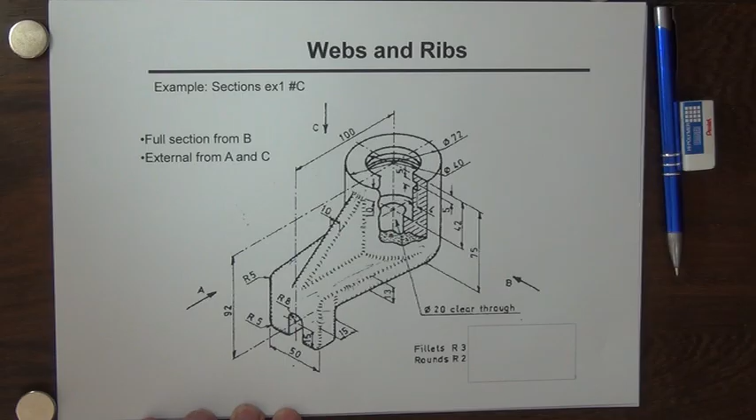Let's have a look at sections exercise 1, number C. So what we can notice over here is the component has these wormy lines all around most of the outside and inside there. So remember, those wormy lines indicate a rounding. And we can see at the bottom right here, we have been given the size of the rounding. The fillets are radius 3.

A fillet is an internal rounding, and the rounds are 2. So these external rounds have a radius of 2. So that would be these ones, the ones on the outside, down the bottom. All those ones have a radius of 2, and the internal ones have a radius of 3. That one would be a 3 as well.

We can notice that the top of this cylinder on the right hand side, the diameter 72 cylinder, has a sharp edge on the outside and the inside. And the top is completely flat because that line there is also a straight, sharp line and not these wormy lines. So that means manufacturing wise, this component will be cast, and then the top of the cylinder will be machined flat. Remember, when we machine or cut, we cut something and it has sharp corners after we cut it.

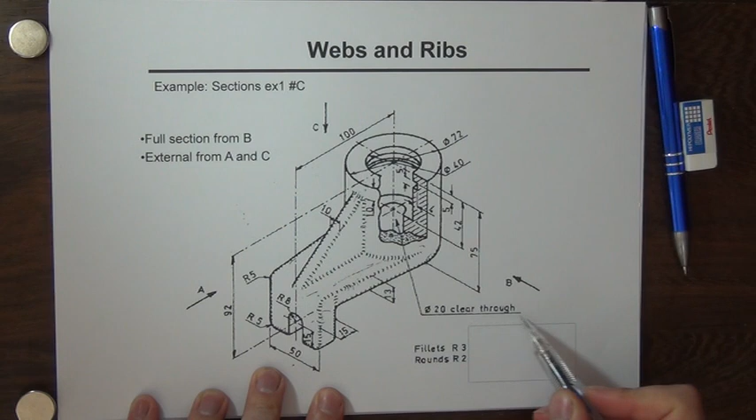If it is cast, melted and then poured into a shape restricting device, the outside edges all have these roundings on them. So this is machined afterwards. The hole going in is also machined because all of the corners are sharp. The hole going through, diameter 20 hole, clear through, is also machined in afterwards. It could be that it was cast with cavities and then just a little bit of machining is necessary, but these surfaces are all machined.

You'll notice there's a small groove here, 5 mm wide and 4 mm deep, also machined in. And here at the bottom left, this line over there is a sharp line, and the one going to the back as well. So this little shape is also machined in afterwards. So apart from that shape and these holes in the top surface, all the other surfaces should be rounded where they join adjacent surfaces.

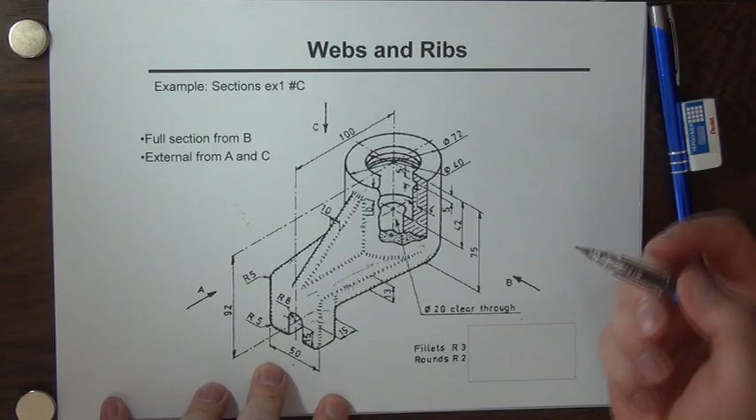So let us start by reading the question. It says, do a full section from direction B. So this is direction B. That will give us a full section view. And then it says, do an external view from A and C. So here we'll have, if that's the main view, then A will be a left view and C will be a top view. So if we just do our view layout planning over here,

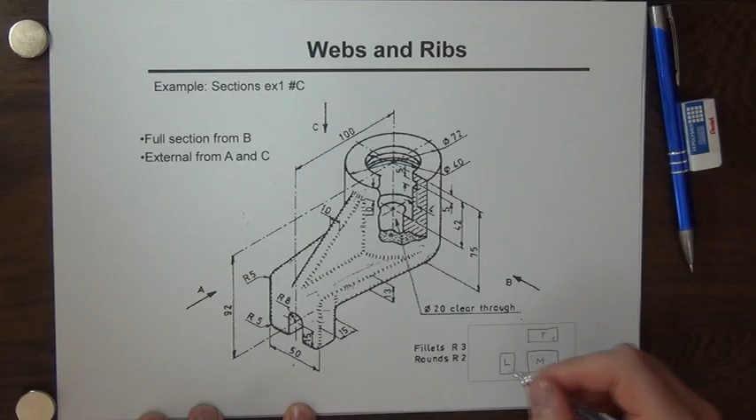that would be our main view. Above that we have a top view. And there we'll have the left-hand view. So this is view B, that is view C, and this one is view A. Good, so now that we know more or less what to do, we can start by drawing the main view. Main view B is going to be a full section.

So I would recommend that when you do these drawings, start with the detail view that has the most information in it. In this case it would be the section view. The reason why I say that you start with it is usually that's where the most marks would lie. So if you end up not being able to finish everything, then at least you have the most important views done. Okay, so you start with your thin pencil, and then we can draw a block into which we will draw our view.

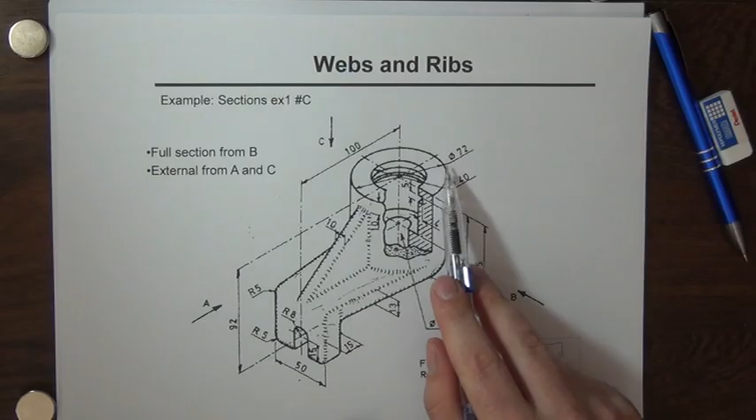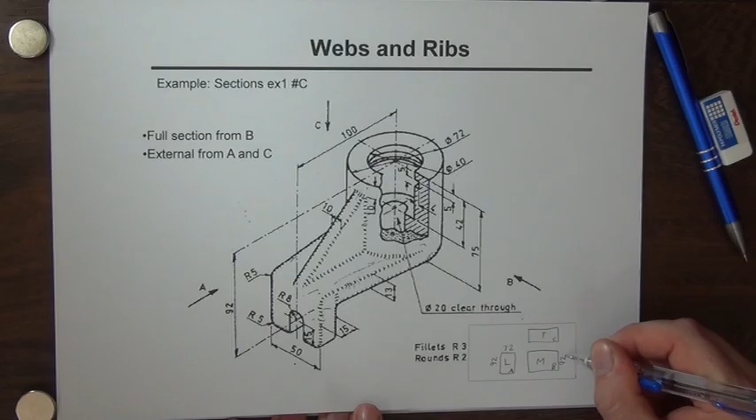So if we go to the question, that cylinder at the back has a diameter of 72. So that means view A has a width of 72. The height over there is given as 75. On the left hand side, the total height is given as 92. My main view will have the same height, 92, and top view will have the same width, 72.

Now let's quickly just calculate the length. From this dimension, all the way from the left to the middle of the cylinder is 100. To get to the end, we must just add the radius of the diameter 72 cylinder. So 72 divided by 2 is 36. So overall length is 136. I just put that there for the people who would want to copy the dimensions, which might have been too small in the zoomed out version.

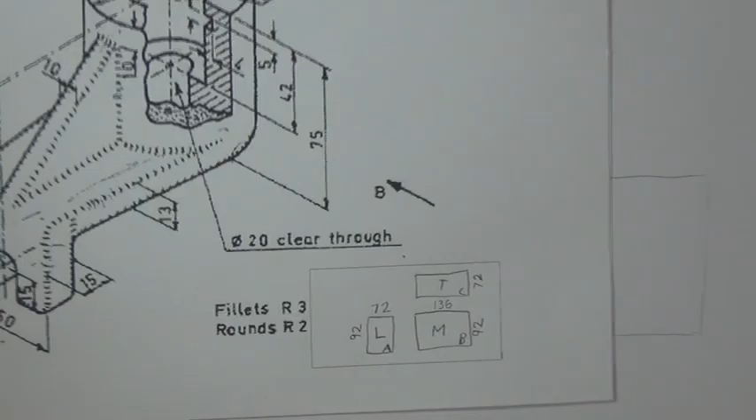Good. So now we can start with our views. Main view 136 by 92. Remember, these dimensions are just used for proportion. We're not going to exactly measure out these values using a ruler because this is freehand drawing, so we don't really care about using rulers. Okay, so now after we've drawn the block for the main view, let's do the block for the top view. Remember, they must be in line.

And then the one for the left view. It is 72 wide, 92 high. Something more or less like that. Good. So the main view. Remember now that the main view is a full section view.

I'm going to start by drawing the outside lines of this view, and then we'll add the internal detail later. Big cylinder has a diameter of 72. Overall length was 136. So the big cylinder is just over half of the overall size. Let's say somewhere there. Something like that.

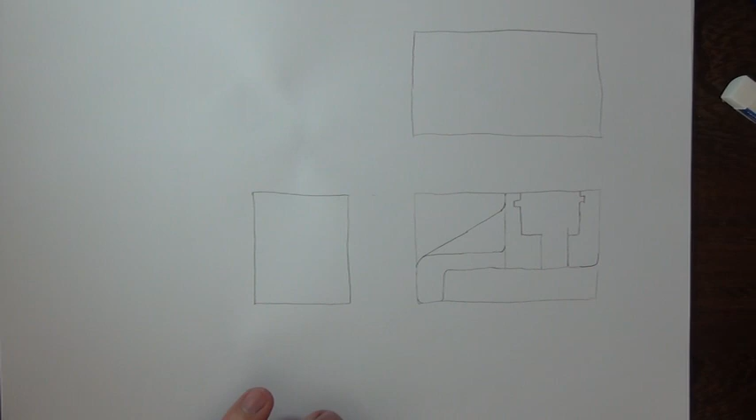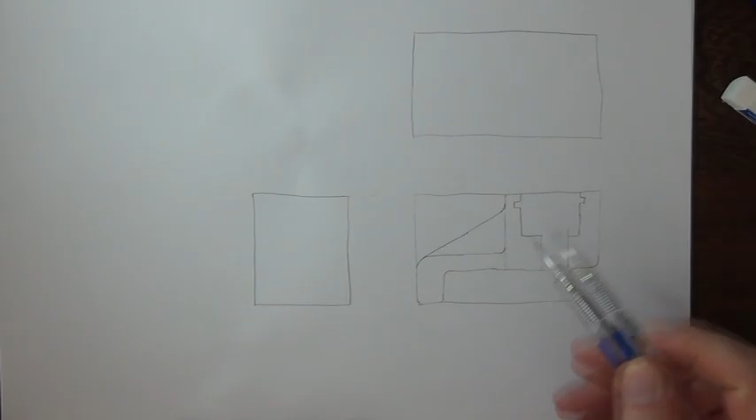Now we can start to darken the visible edges, remembering that this is a section view. One thing to note though is this triangle over here. If I just bring back the 3D, that triangle over there has a width of 10 millimeters. So if we now go and make a section view straight through that triangle, we're going to end up making this triangle even thinner than what it was before.

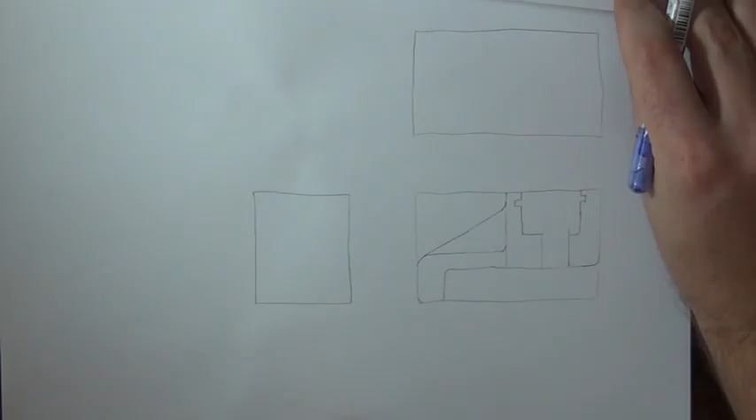So convention with section drawings is when you cut through something that's already thin and you cut it in the plane in which it is thin and make it even thinner, we do not hatch that feature. So basically this triangle of mine won't be hatched over here. And there's actually a very simple reason for that.

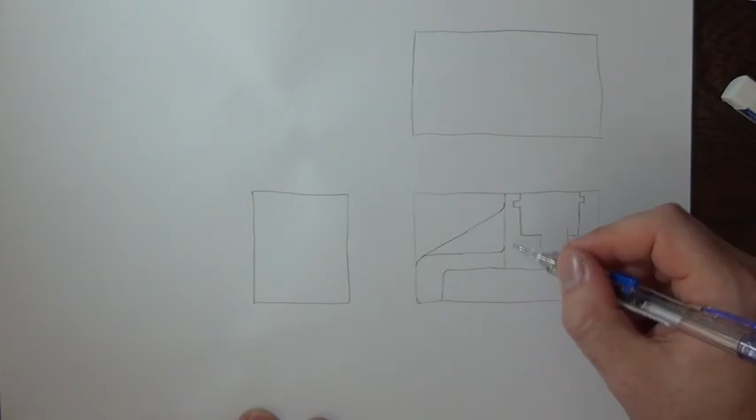The reason is, if we were to hatch this entire thing as solid, we would make the reader of the drawing think that this triangle is relatively thick or comparably thick to the rest of the component. Whereas if we were to exclude this from the section, meaning leave this triangle open, we can show that it is there, but by not hatching it, we show that it is actually thin compared to the rest of the component. So we are not going to hatch this triangle.

Remember we had that little cutout at the bottom left as well. So now I'm going to use my thicker pencil and I'm going to darken all my visible edges.

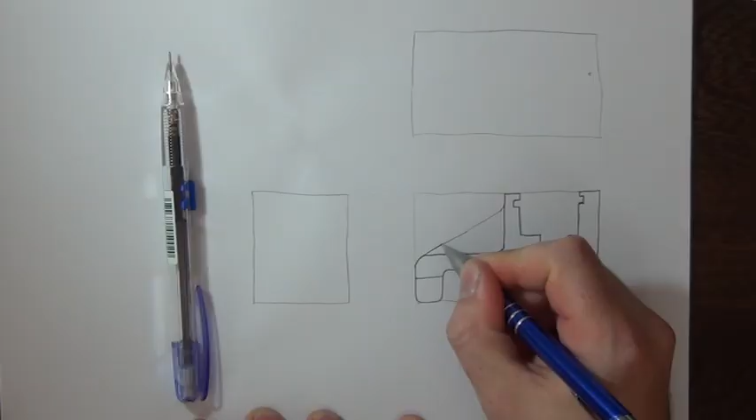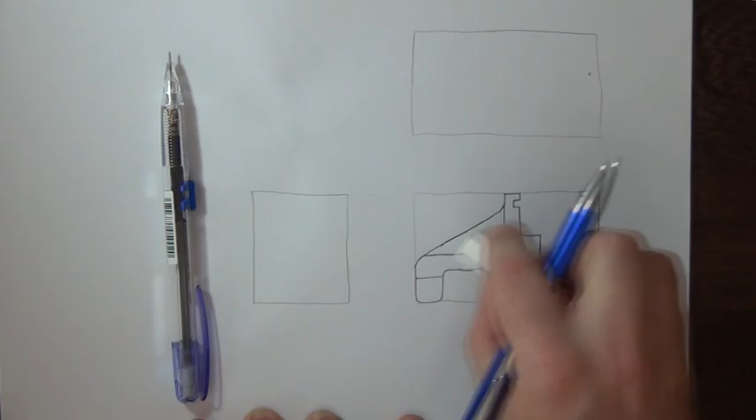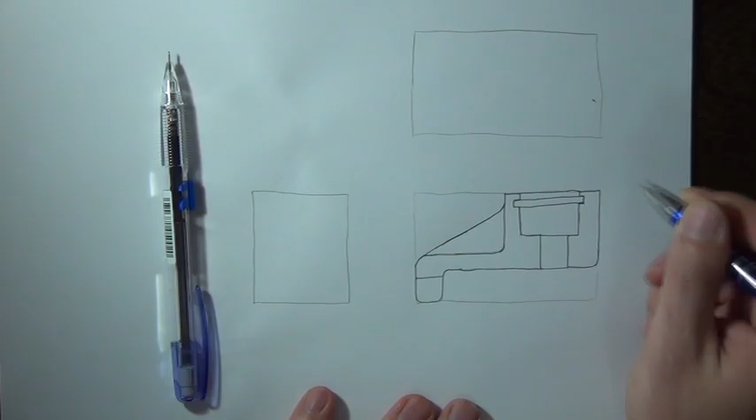Good. So just some things to remember. Because this is a section view, all these lines in the background, which were internal, would actually now become visible. So it's important to remember to draw all of the background information in there as well. And now I'm just quickly going to erase my block.

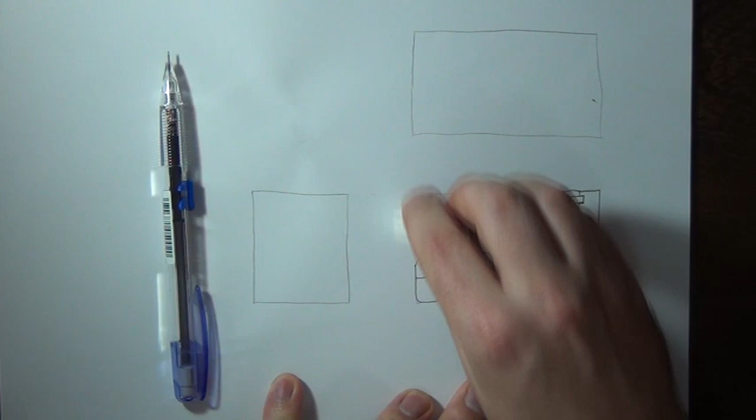Okay, so now that the outside lines of the main view are done, we can now go and draw in our hatching lines. So hatching lines are done using your thin pencil and usually at an angle of 45 degrees. It can be 45 degrees in that direction or in that direction, it doesn't matter.

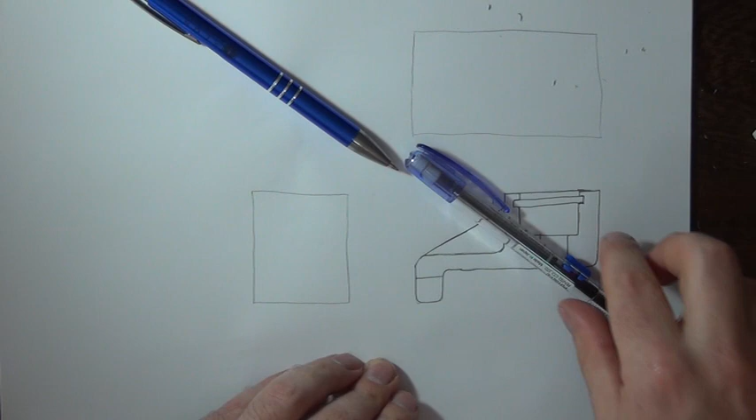Best would be to look at the drawing view and see if there are any lines already at a 45 degree angle. In this case, we don't really have that problem. But if this line had been at 45 degrees, it would make sense to use a different angle like 30 or 20 or something like that. But for this example, it is not a problem.

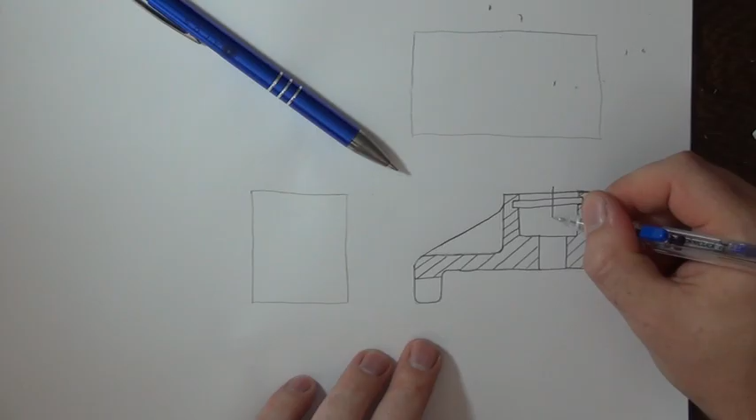Good. Now that we have those done, we can draw our center lines. Center lines are also done using your thin pencil. So that would be our section view. Now let's have a look at the top view.

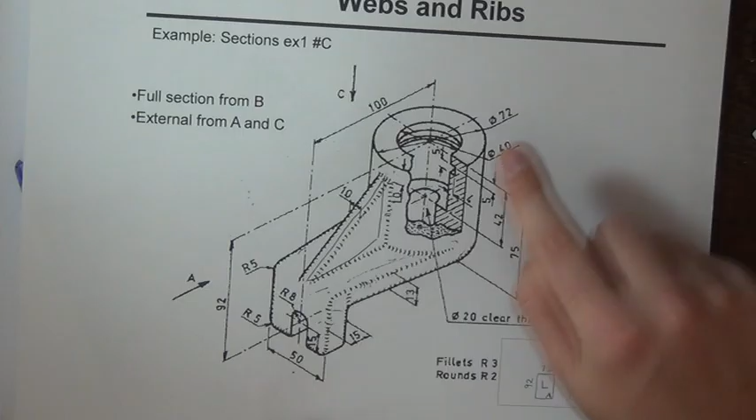So from the top we'll see the big cylinder with a hole in it. We'll see this web of ours and this bottom plane that goes smaller to the left. 50 over there, 72 over there. So this one should be just a bit bigger than 2/3 of that one. So in my top view, center of the cylinder would be somewhere there.

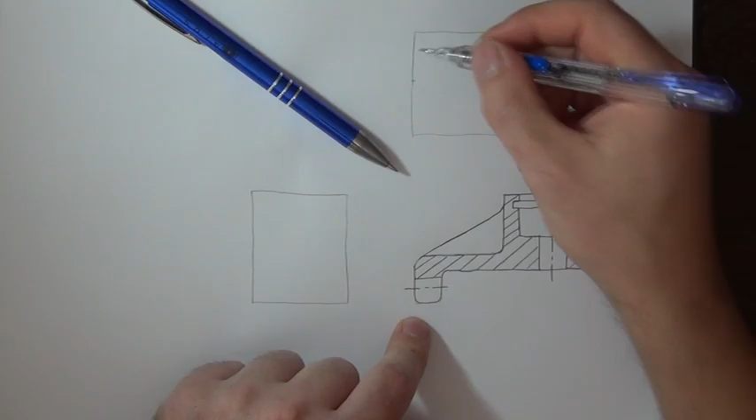Something like that. We have the smaller circle inside of that. And then inside of that we have the even smaller circle. Good. Now on the left hand side, remember I said it is just a bit bigger than 2/3 of this cylinder, so it would be somewhere there. Something like that. And now from here it goes out tangent to the big circle.

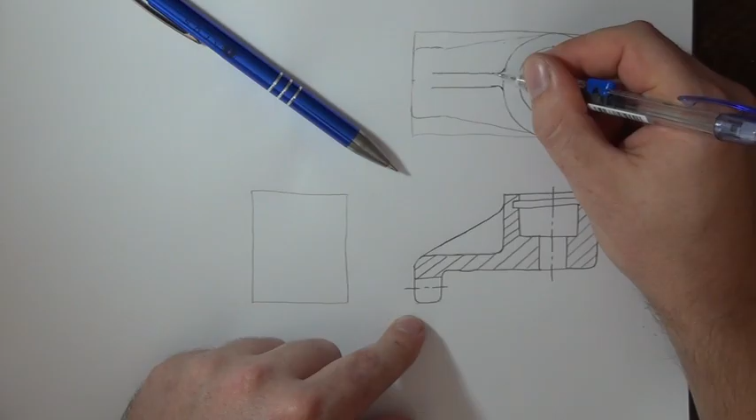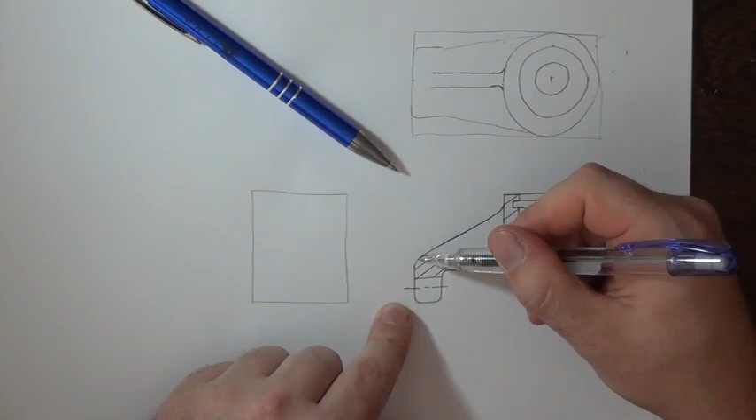Like so. And this inclined plane, remember we had a rounding over here. Same on the top side. Now here we have an inclined plane tangent to a big radius. Big radius basically just means the point of contact on this inclined plane is visibly different from the outside edge. So that distance is quite obvious. If that radius was very small, the horizontal distance would be very difficult to actually see.

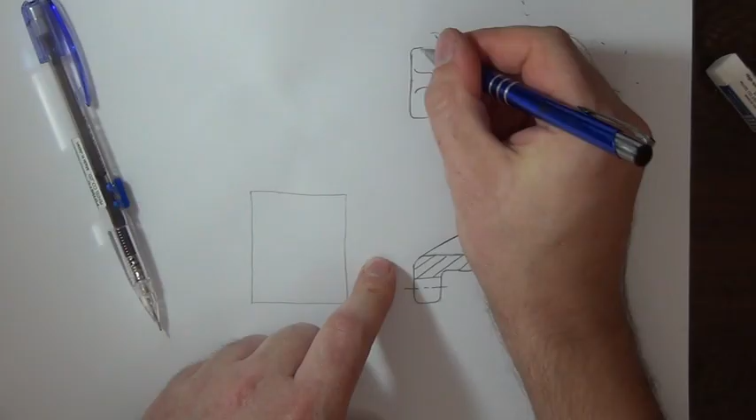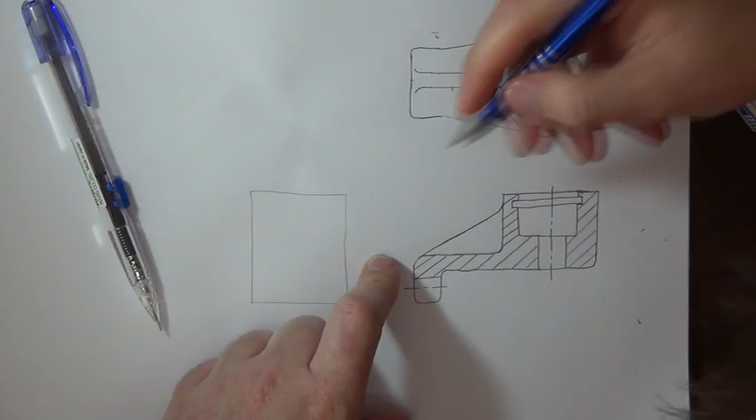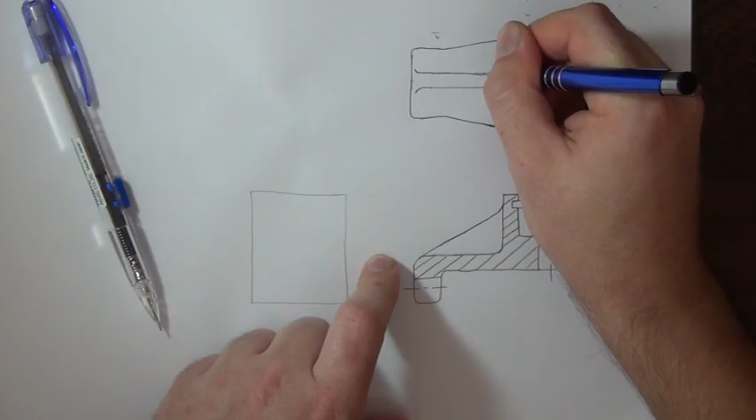Something like that. So now I can darken all my visible edges and erase my construction lines. Good. And the small circle. Like that. Then center lines. Remember, we do have this little hole at the bottom, so I'm going to use the same center line for the whole top view.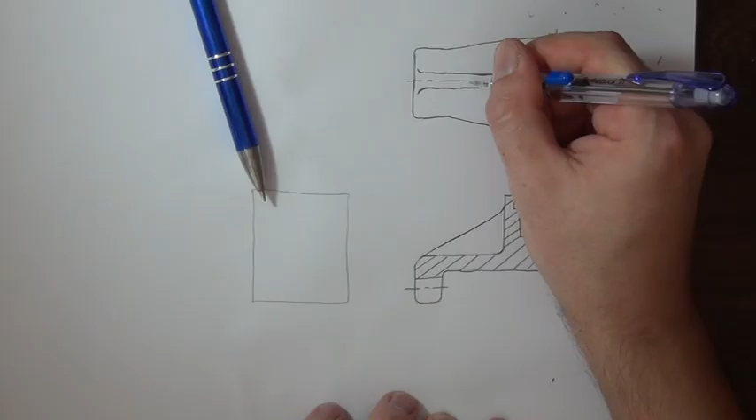So basically what that does is, firstly it shows that this hole and this one are on the same level, and it also shows that my top view is symmetric. So by using that center line all the way through, I actually show more information with less effort. Now let's do the left view.

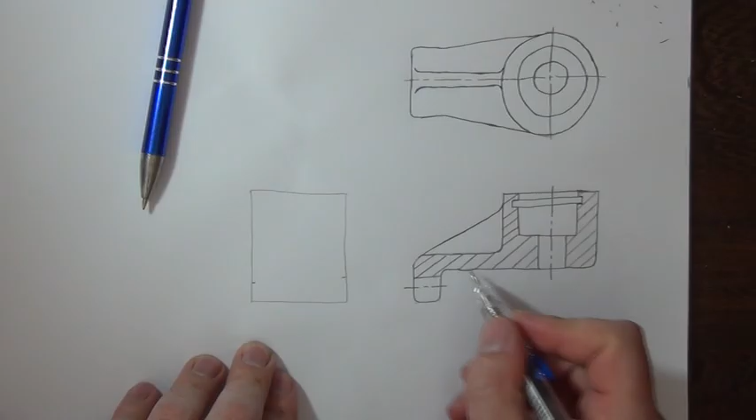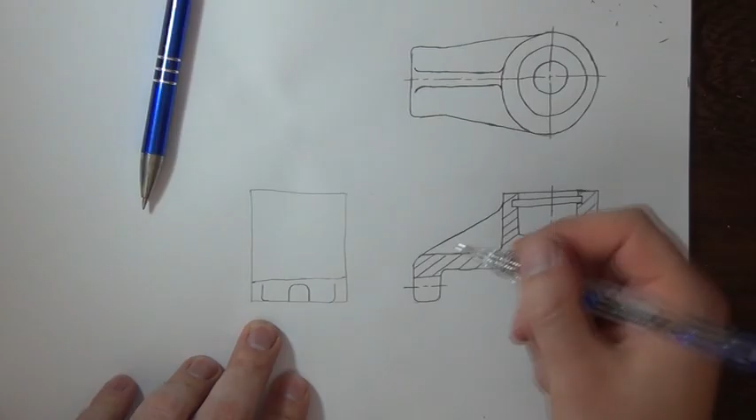So for the left view, we've got the big cylinder in the background. This is just the bottom of that big cylinder, just a construction line. Then we have this portion in front. This line is below that line, so something like that. Goes out to the side, as we said just now, a bit more than 2/3 of the size of the total width. Then we have a round over there.

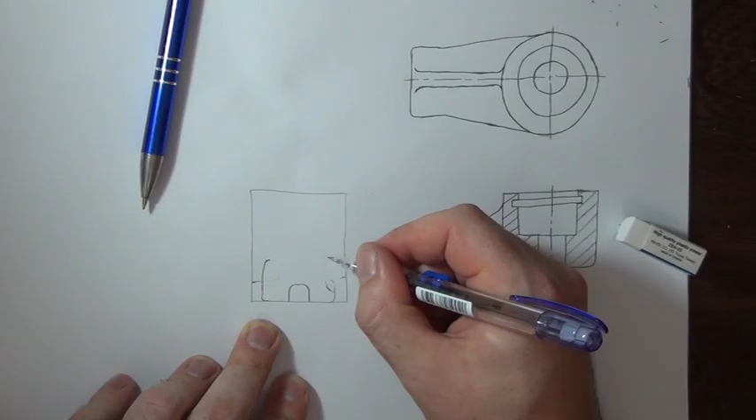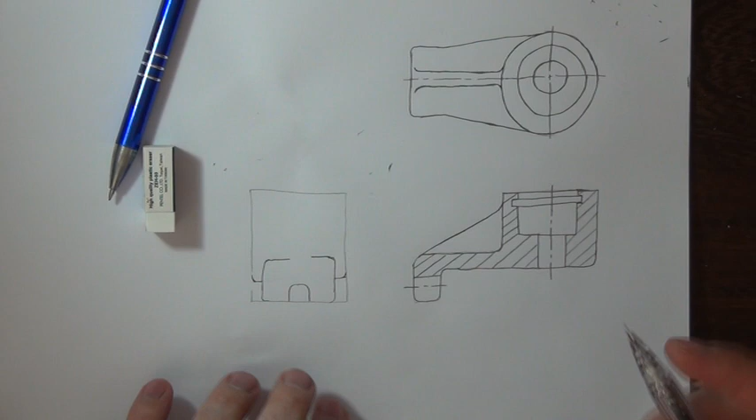Let's transfer the top height. Goes in and goes in. These lines are for this bottom face, which if we view it from the left hand side would actually be visible. Just remember the rounding as well. Good. At the top of that we have this web of ours.

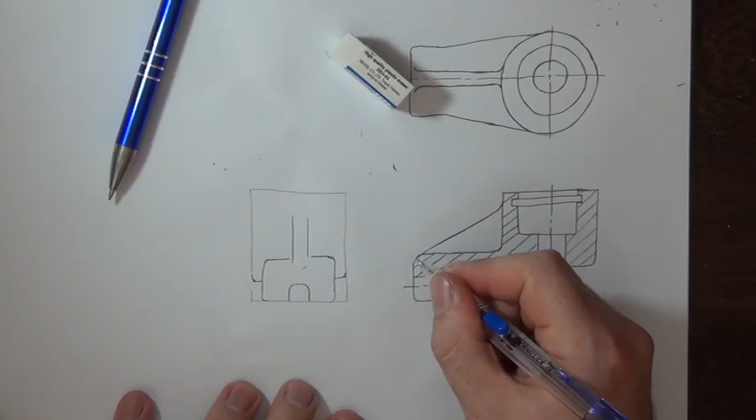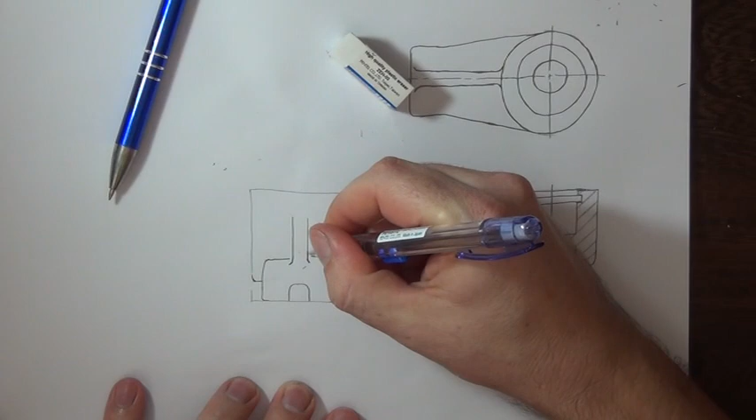Just quickly, this hole at the bottom has a radius of 8, so its width is 16. The web has a width of 10, so it must be visibly smaller than this hole. And again, because we have an inclined plane on a big radius, we'll indicate that by these curls at the end of the line over there. We had a rounding inside there, so that means this corner has a rounding on it as well.

At the top there, where this inclined plane meets the cylinder, it is rounded. So this is a flat plane meeting another feature at an angle. It is rounded, so it won't make a sharp corner, but it is a small rounding. So to show that it's a small rounding, we will draw that line that doesn't touch the sides and curl outwards from there. And the big cylinder in the background.

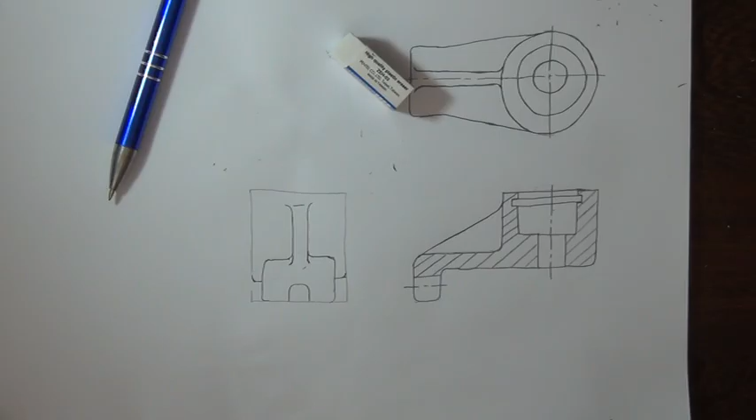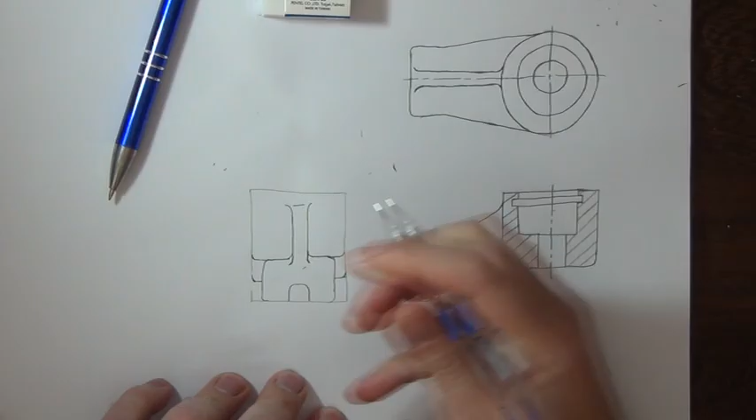Lastly, what I just need to draw is this top surface. Something like that, and then I can complete the cylinder in the background. And just quickly erasing my construction lines.

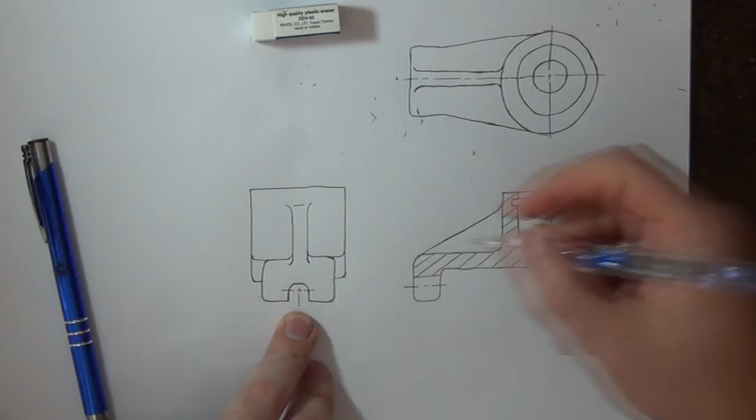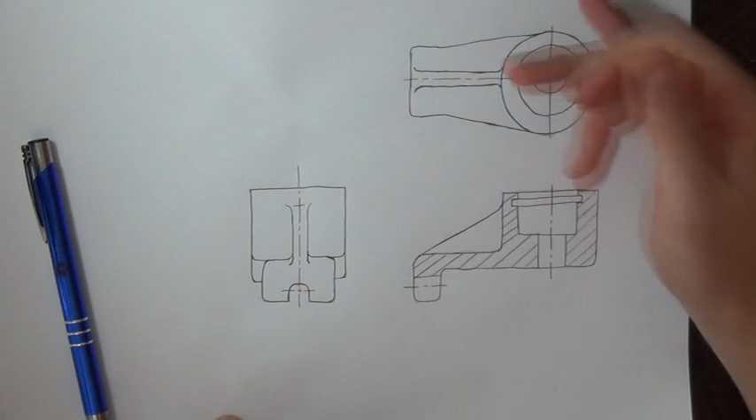Good. Last thing to do is use our thin pencil and add the center lines. So this is the center line for the circle over here, and then from there upwards I'm going to draw the center line for the cylinder in the background. So now we have all of the lines sketched for the drawings. Next thing to do is add all of our dimensions.

It's not necessary to show the hidden detail for these cylinders in my left view. Reason being, that was the whole purpose of the section view over here. If you wanted to, you could show the hidden detail for this circle in your top view. So adding that allows the reader of the drawing to see that it is actually a circular ring that is cut in on the inside of that cylinder.

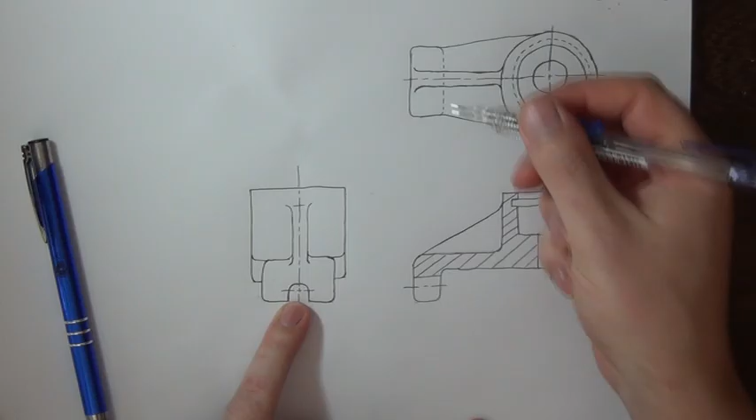We could also show the hidden detail for this line in this view. Something like that. It is not necessary to show the hidden detail lines for that feature in the top view because I have already shown it realistically in my main view. And we can show the hidden detail for this bottom plane in my left view. Like that.

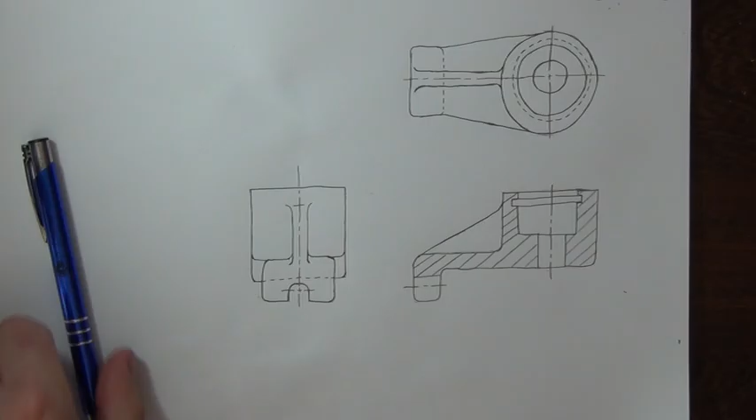Good. So last thing to do is to add all of the dimensions. Typically what I would do is I would go and look for a dimension in the sketch and in the question and then place it in one of my three views. There isn't really a rule as to which dimension must be in which view. You'll have to decide that based on probably best termed common sense. So this 100 can be placed in my main view.

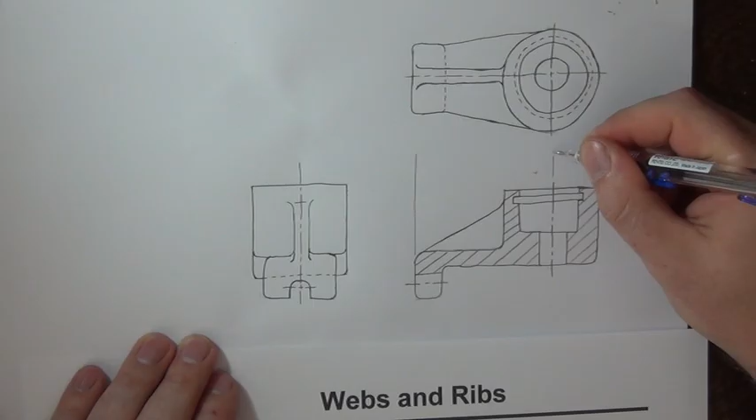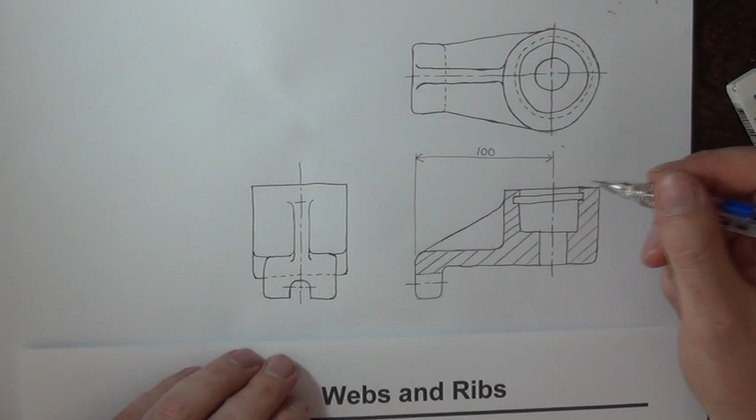Remember, we're writing from left to right, bottom to top, on top of the line. And the dimension line has open-ended arrows, not too big and not colored in. And also the arrow must be a physical arrow, not just a colored in portion on the end of the line. So once you've placed the 100, you can mark it off in the question. That just helps you to see that you placed all of the dimensions necessary.

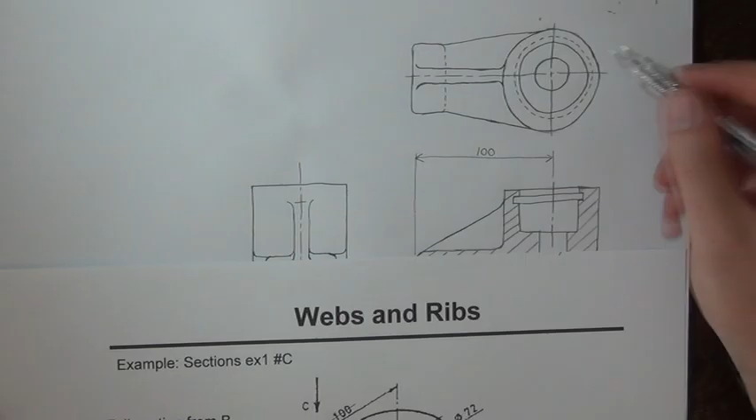The 72 we can place in our top view, in the main view or in the left view, it doesn't matter. I'm going to place it in the top view because to me it just made the most sense. Remember the arrows. So that means the 72 is now done. Diameter 40. 40 can be placed in this view or in that view. I'm going to place it in the top view as well.

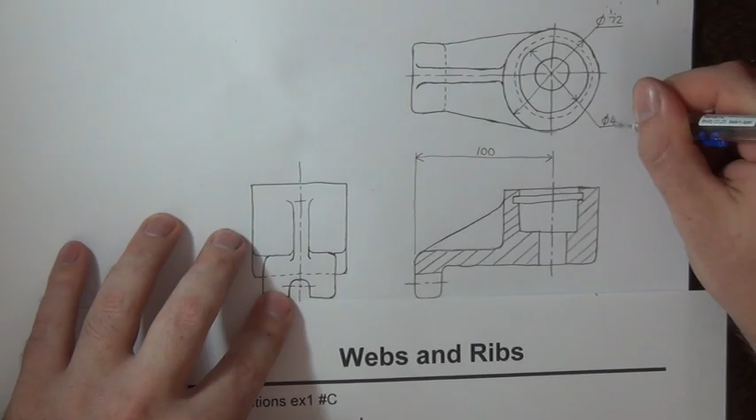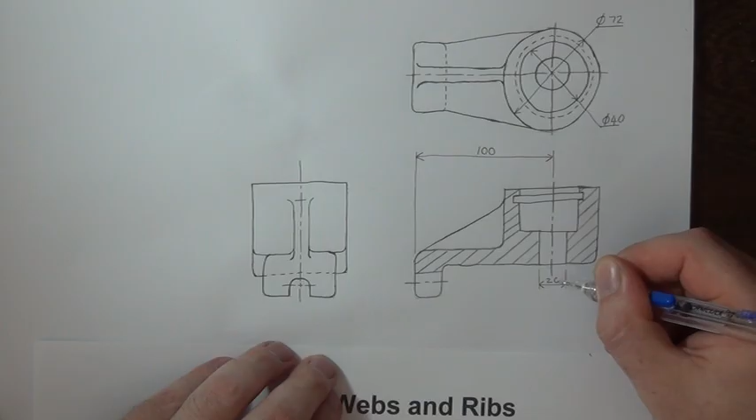The reason why I put it in the top view is it is going to be difficult to place it in this view without crossing that line and without having to extend my extension lines over the hatching. So placing it in the top view made most sense. Remember, with these diameter circle dimensions, we usually say 2 maximum per view. So I'm going to do the small hole at the bottom in my main view. So now I've got the 40 and the 20.

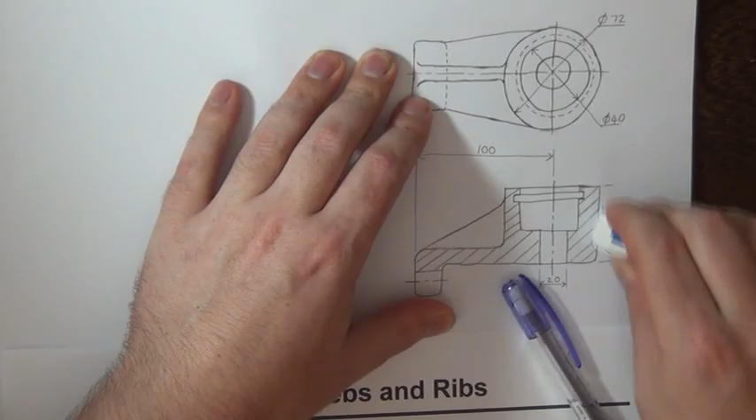Let's do the 75 next. We can place it either in the left view or in the main view. Okay, 75 is done. To the inside of that we have the 42. Oh snap, it would have made sense to put the 42 outside there as well. So I'm just going to move my 75. And now you would notice why it is beneficial to do your dimensions using a pencil. If this was written in a pen, then it would have been impossible to move it outwards.

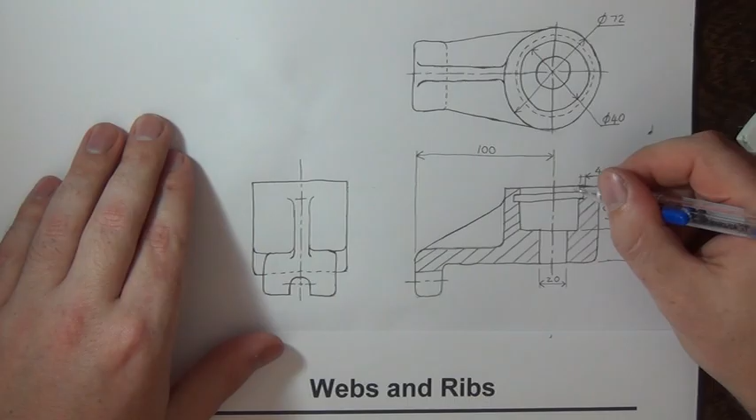So that gives me the 42. And there the 75. Then let's do these dimensions over there. The width over there is 4 millimeters. The height of this groove is 5 millimeters, and it is 5 millimeters from the top. So let's move these two even more out.

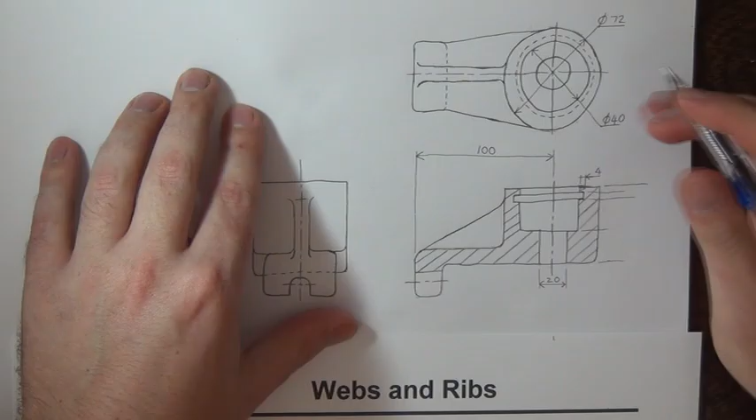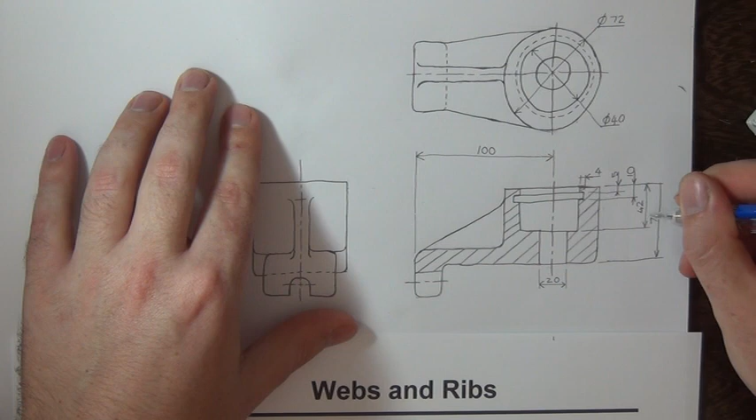Remember, you are allowed to add values and give the dimension in a different manner. So instead of giving the 5 twice, I can give that one as a 10. Then the 42. And then after that, 75. Good, so now I've given that information, I've given that one, I've given that one, I've given that one. Next what we need to do is we need to give this 10, that 10, the 13, and the 15.

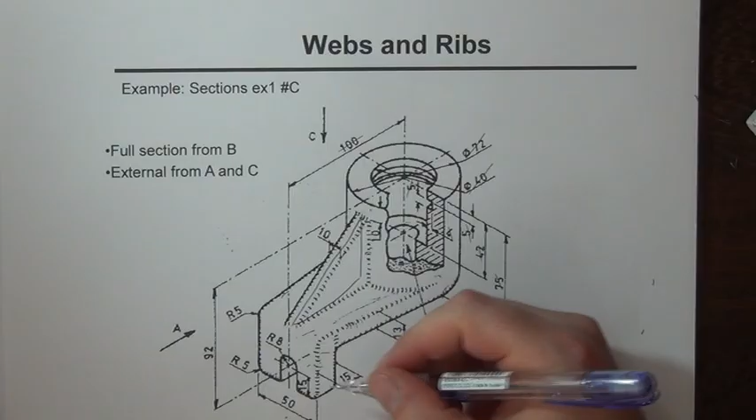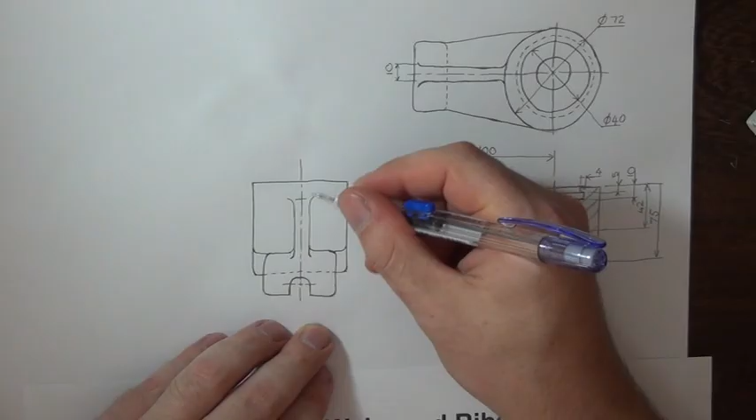So the 10 width of the web I can give either in my left view or I can give it in my top view. So there's the 10, the 13 I can give in my main view, or I could give it in my left view. There's the 13. The 10 height I can give either in my left view or in my main view. And the 15 width over there I can actually only give in my main view, because in my top view it is hidden detail.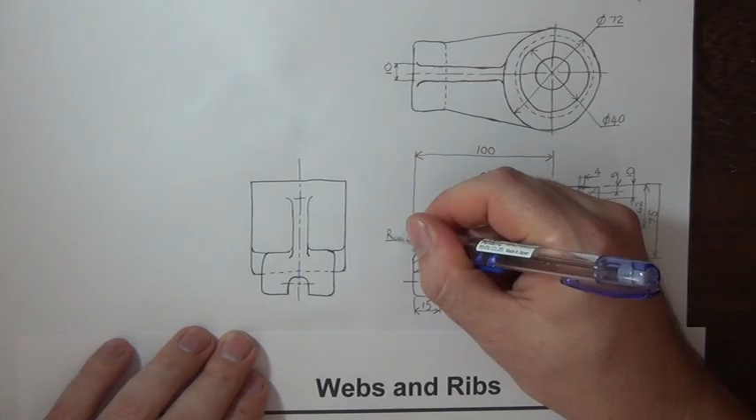Good, so now I've given this one, that one, that one, and that one. Next, the R5, R8, that R5, 15, 92, and 50. The R5 for this radius I can only give in my main view. This R5 over there I can only give in my left hand view. Just remember the arrow.

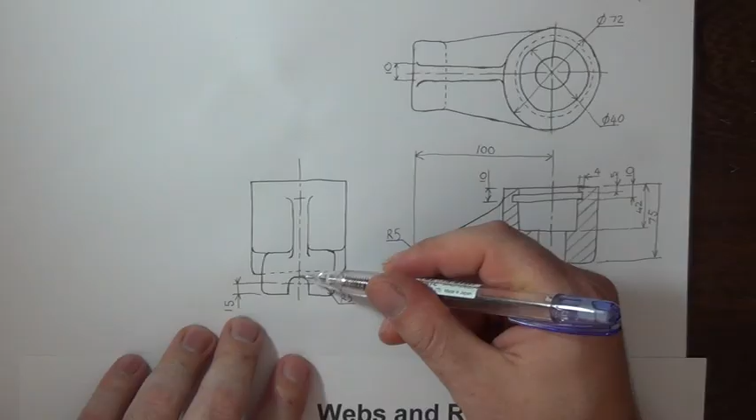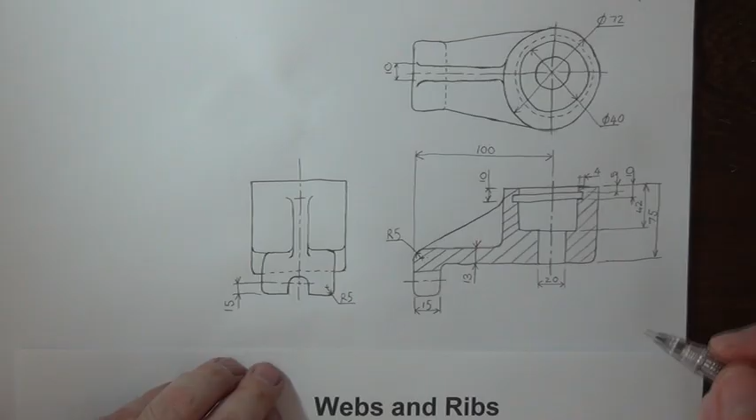That 15 I could have given in my main view, but in my left view it is a bit clearer because now I can see it refers to the center of a circle, where over there it would have shown the same information. I just personally felt that it was a bit clearer in this view. Good. Then the last one to show would be the 92. This 92, I just noticed, is to the center of this circle, so the total height is actually not 92, it's 107.

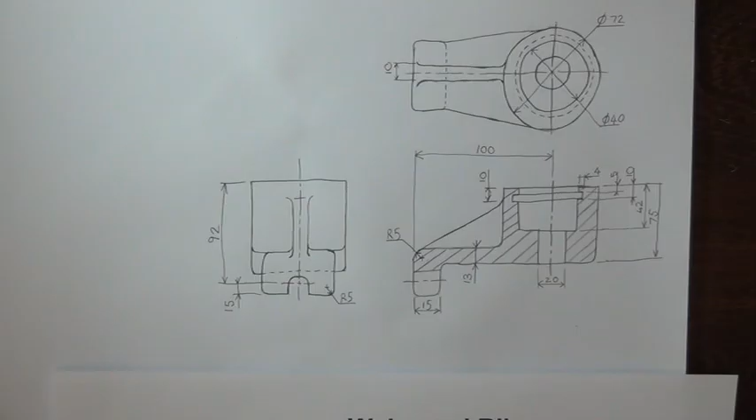So the 92 I can give in either this view or in my left view. Seeing as I'm already referring to this line, I'm just going to extend it a little bit and put the 92 in there. So now I've got that one, that one, that one, that one. I still need the R8 and the 50. And the R8. Remember, you can place a dimension inside of a view, although we prefer that you put it outside. In this case I just left it there because drawing it all the way out there seemed unnecessary.

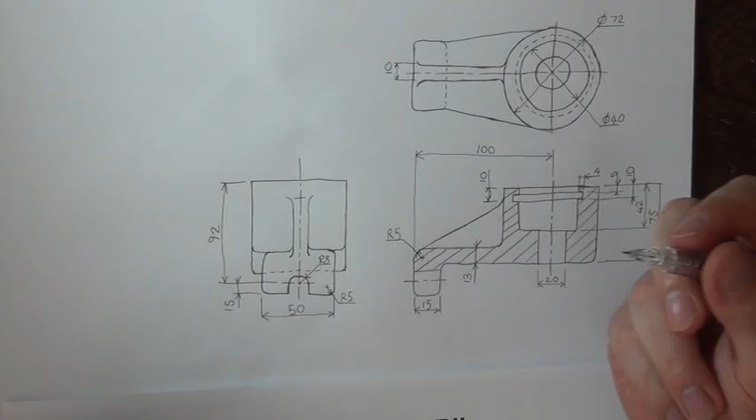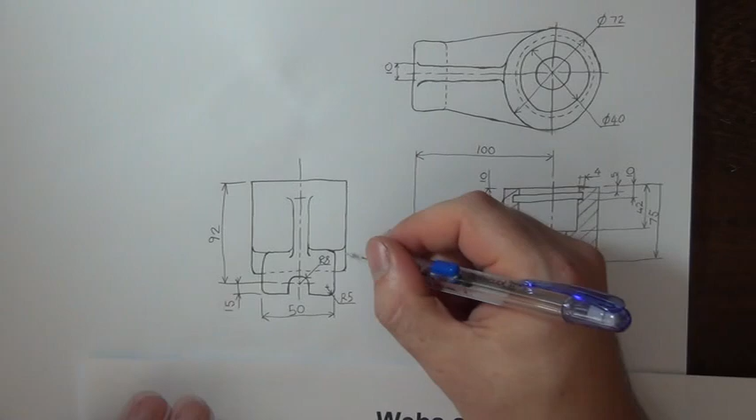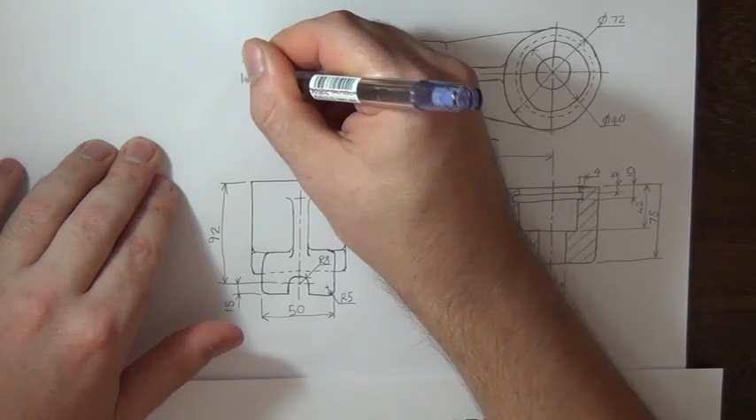Just one last thing, this flat plane going to the back has a rounding going down. So I've shown the rounding at the back end where it meets the cylinder, but I still need to show this rounding where it goes down. So I'm just going to add those two lines there. Good, and that means we've shown the 50, we've shown the R8. Last thing to show would just be fillets R3, rounds R2. So that you can just copy the note over. And that is pretty much the memo for this problem.